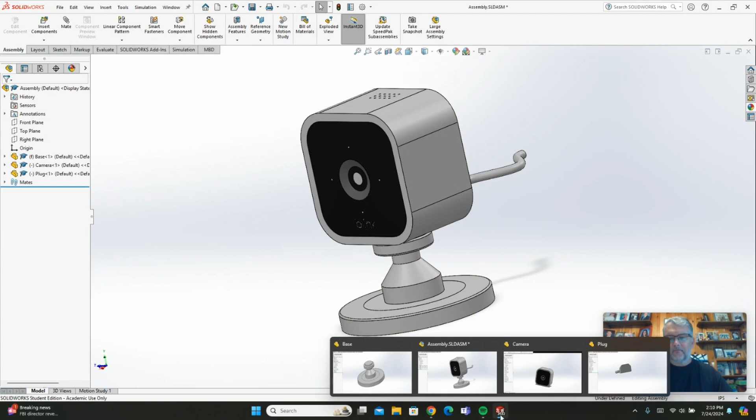I said before and showed you we're going to make a Blink camera. We're going to start with the base. This is what the base is going to look like, but I'm going to recreate this for you. Through it, we're going to show the line tool, the revolve tool, how to do a fillet and an extrude. Pretty basic operations, but that's where we're going to start. I think this is the easiest part of the three, so we're going to start with this one.

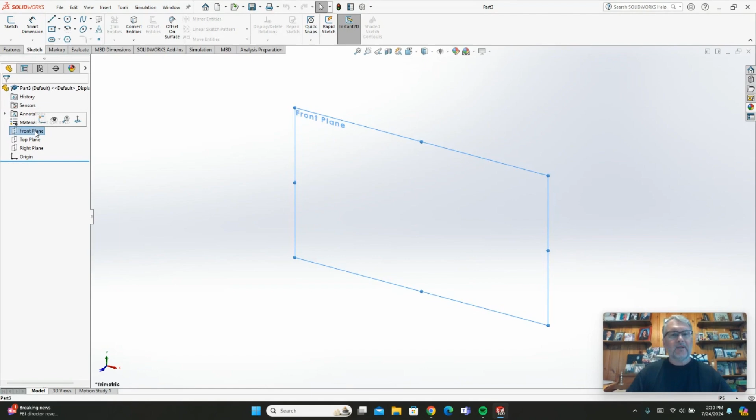All right, so first thing you want to do, you want to go up to a new design. You hit Part, open a part, and it gives you this window that we had talked about before. I had mentioned to you before about what planes to pick. So for this one, I'm going to pick a front plane, and I'm going to hit Sketch. Now, here's one of the reasons why I'm going with the front plane. I'm going to create a half of that base on here, and then I'm going to revolve it. So I want to look straight on, like I'm picking it up and looking at the camera straight on.

That's the piece that I'm going to create. And I'm going to use the origin point here to be the middle of the base, the bottom middle of the base. Okay? So let's get started. We're going to immediately come out with our line tool. Now, we don't know exactly what the shape is. We don't know what the sizes are. I've kind of worked ahead and I know what they are. But what I'm going to do is I'm going to draw kind of what the shape might look like.

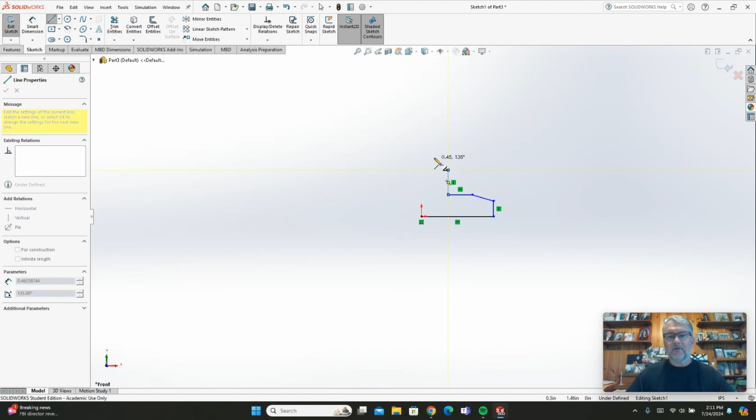We kind of have a slant. It kind of goes in. Then it goes up. Then there's another slant. And now notice, again, there's different ways you can do this. But I'm just kind of creating what I believe it's going to look like. Now, it's obviously not to scale,

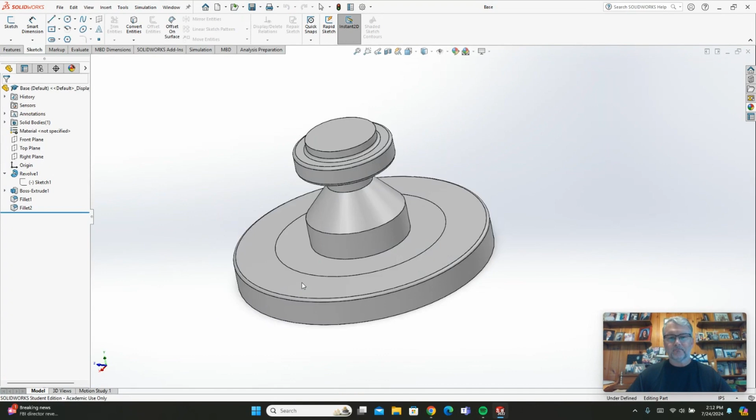but once I have the shape, in other words, when I look at this, I'm going to go to my view where it shows a good side view. Once I look at it, I'm going to draw this half. And I drew this directly from the part, taking measurements. So depending on what you're going to do, that's sometimes the best way to do it. Completely up to you. But now I'm going to add my dimensions.

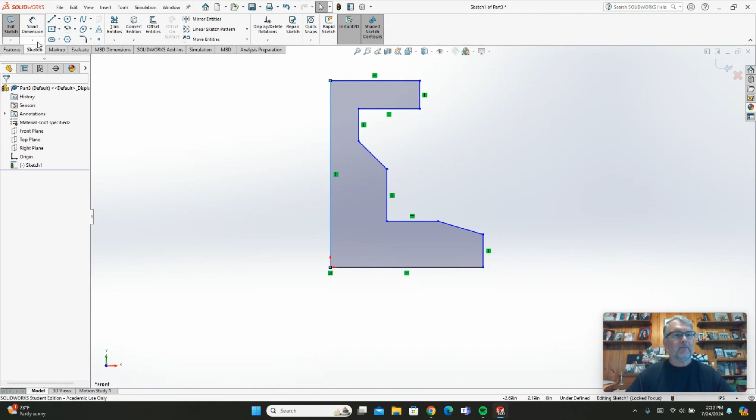So I've used the line tool. I've created, okay, it looks something like this, maybe, sort of. But now I have to go in and put my dimensions. I'm going to use my Smart Dimension tool. And I know that my base is about 1.125, which is 1 1/8. And then I'm going to start putting in my other dimensions here. Well, I got lucky on that one. That's 0.25 exactly. And I know that from this line to this line, I am

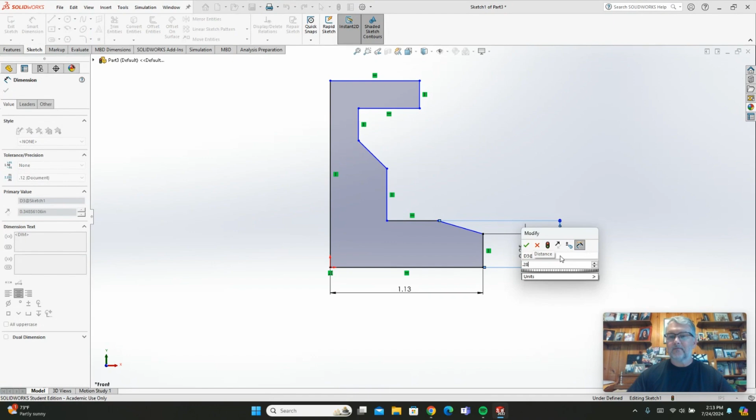0.28. And again, these are just measurements that I took based on me measuring the actual part. I know that from this line right here, I'm going to bring that one out. I know that's 0.25. And you can kind of see it's slowly coming into shape the way that I want it. I know that this line here, or my total height really, is 1.19.

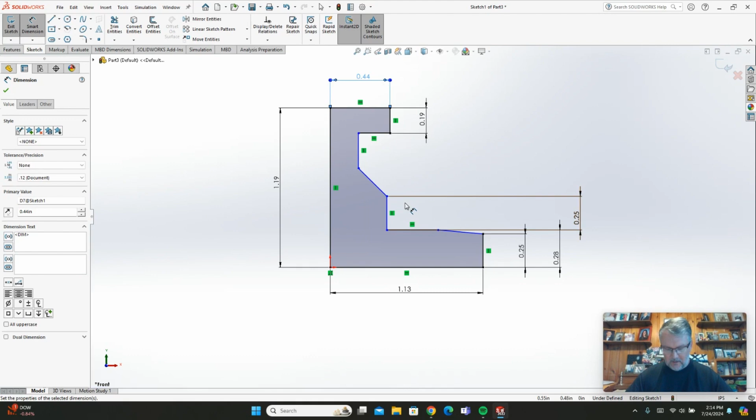I also know that this is also, well, it's actually not 0.19, it's 0.1875, which rounded up, of course, is that. I know that this is really my radius. My radius is 0.44. And again, I got this information from directly measuring, and I know that the radius of this, I'm just going to put that right on the drawing, is 0.2.

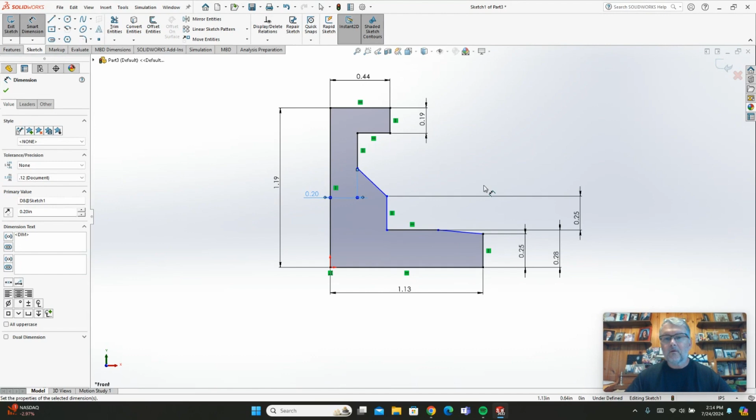All right, so let me make sure, looking at all of those. I want this point here and that point there to be 0.375, 3/8. All right. And I think that is the dimensions that I'm looking for. What's nice is I can go back and change those anytime I want. But now I have a good idea.

Do I have a diameter of that? What did I define? Okay, we're going to go with this. If I got to change it, I can go back and change it. Not a big deal. So that is a half. It's a section view, half of what I want to draw, which really, if I looked at this and I divided it, except for this top part, ignore that. If I went straight down here, it's this piece.

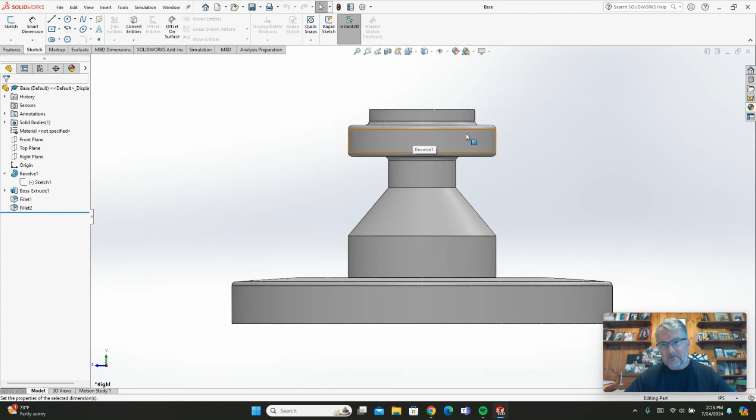And I'm doing it this way. And I should mention, there are many different ways you can draw parts. A lot of people do it different ways. That's absolutely fine. I chose to do it this way to show you the revolve command. You're going to be using probably the revolve command quite often, so why not use it on this? I could have started by doing the base, extruding this, doing a loft here, another extrude. I could have done all that. I chose to do it this way. All right, so there's my basic shape. That's great. Now I'm going to go to my features, and I'm going to go to revolve.

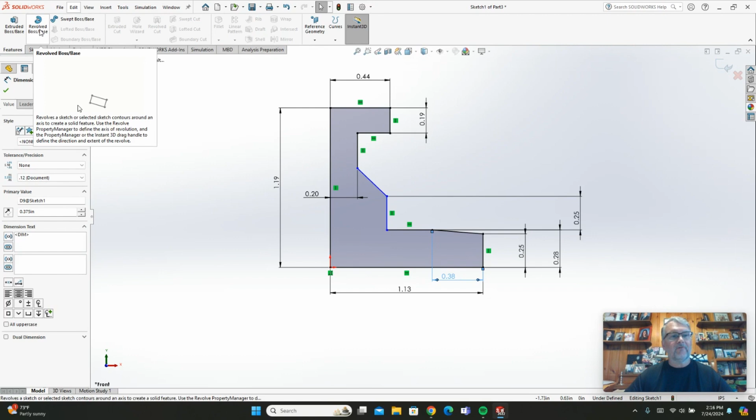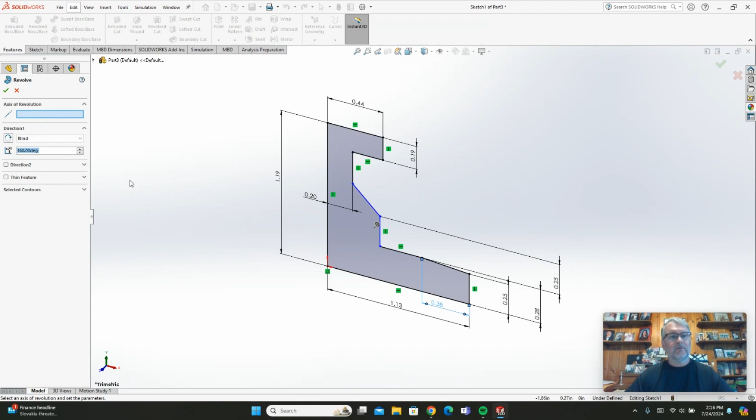When I go to revolve, it gives me this in the left window, and it says my axis of revolution. That is the point that this 2D sketch is going to be revolved around to create a 3D sketch, and it's going to go around 360 degrees. So if you only want 180 degrees, you can do that. I'm doing all the way around. So as soon as I touch that axis, you can see it creates that for me. I'm going to hit OK. And there is my base starting to take shape.

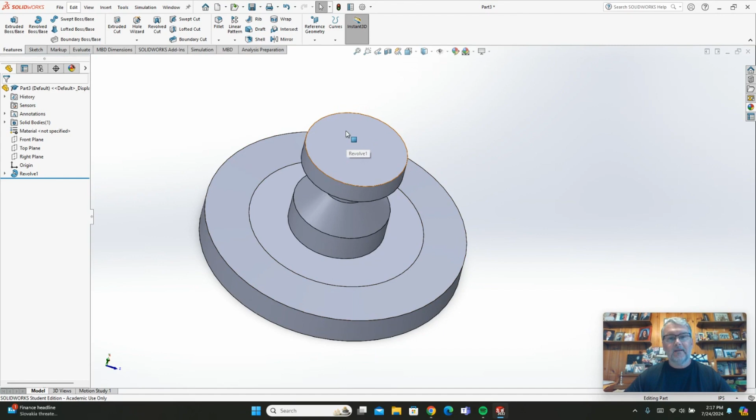Now, when you look at the part itself, a lot of pieces are rounded. So what I'm going to do, well, actually before I do that, I'm going to now do a small extrusion from the top. This is where it's going to connect. The camera will come down on top of it, and I have to have a little extrusion there to be able to connect to. So I'm just going to do a top view. I've chosen this surface. So when I go to sketch, now that blue surface is what I'm actually going to be sketching on.

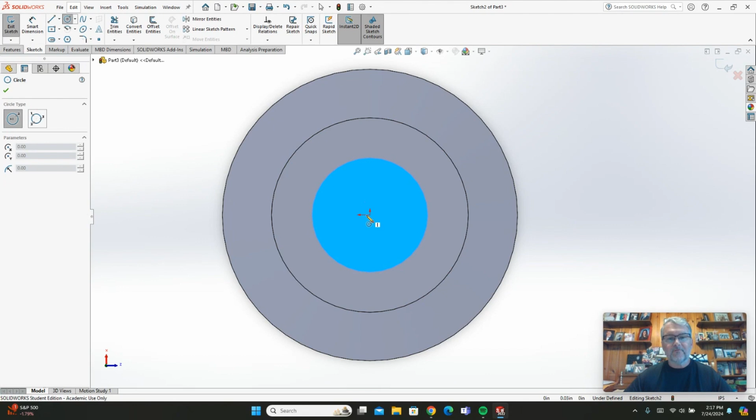I want a round extrusion from there. So I'm just going to pick that middle circle. Don't remember exactly what that dimension is. I think it's 5/8. Well, 0.58. I think it's 0.625, which is 5/8. I'm going to go with that. Now that I have it dimensioned, I'm going to move that, and you can see that that is on that surface. I'm going to go to Features. I'm going to do an Extrude, and you can see it popped up there a little bit.

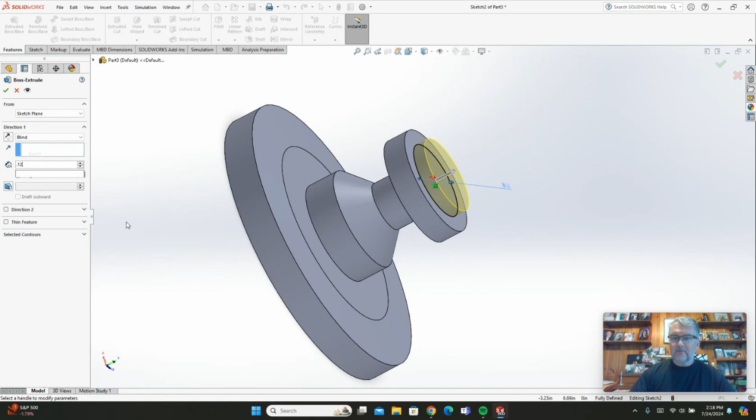Okay, now this is an extrude, so it's going to give me material. As I mentioned before, I can take that arrow and adjust it to whatever I want. Right now it's set at 0.10, which I think is the default, but I want it to be 1/8 of an inch, so I'm going to go 0.125. Then I'm going to hit OK, and there it is. All right, so that is my base, but it doesn't quite look like that. There's a lot of radii in here.

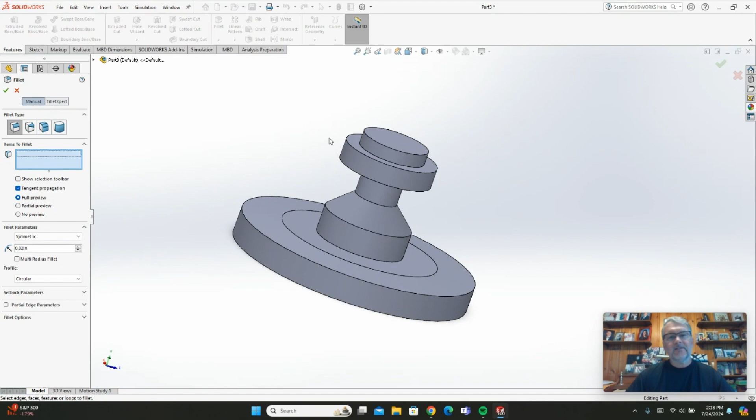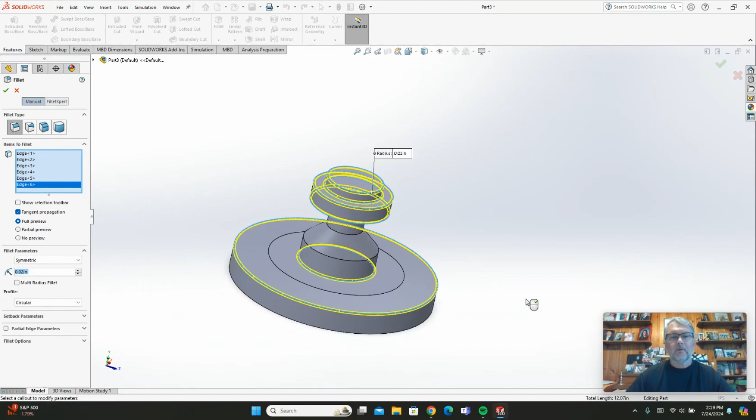So I'm going to go to my fillet command. And first the thing I'm going to do, this 0.1 is way too big. Again, that's a default. In fact, I think I'm going to go 0.02. The nice thing is I have full preview on. So when I start clicking what I want to have a fillet on, which are going to be all these surfaces, it will show me what it actually is. And I'm going to put one here, and I'm going to put one here. And I'm going to hit OK. And that kind of cleans up a little bit. All right, so that is our base.

I want to show you this feature again. If I go to my view menu here and I click this, notice how all those extra lines go away. Much prettier view if you're going to print it out. Okay, that's kind of how you would want it, I guess. But it gives you a nicer view. I'm going to keep it here for right now because I'm going to come over and I'm going to add some color to this. Now, it's white. My camera that I copied from is white. And it's pretty glossy. So I'm going to go with this white high gloss plastic.

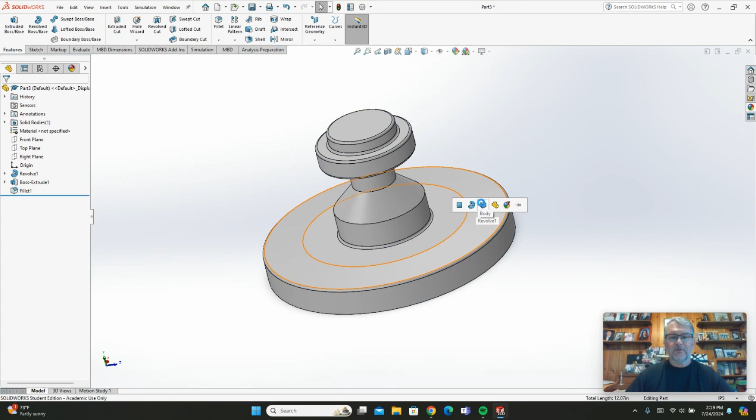I'm going to drag it over, release it, I'm going to pick body, which means pretty much the whole thing, and I'm going to click OK. And you can see it changed it. To me, that's cream color, but whatever. That's what it picked. And I can, again, get rid of all those lines if I want to. So this is our base. We've gone over the revolve command, the line command, how to do an extrusion, and the fillet. So this is the easiest part probably out of all of them. I wanted to get this into one video, and I think I did that, and it wasn't too long.

But now we're going to go on to the camera. All right, so on to the camera, the first video to create the actual camera.